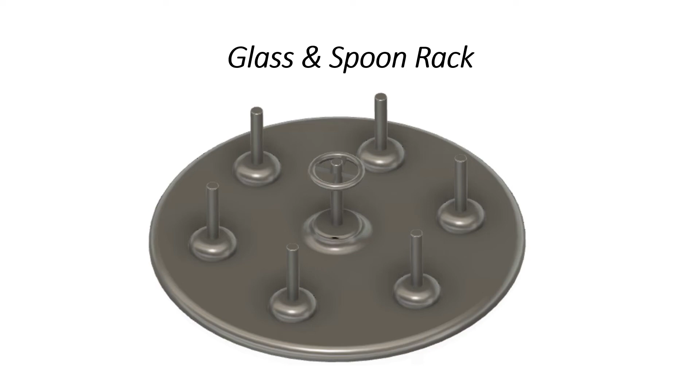In this exercise, you are supposed to sketch and design this glass and spoon rack. This is a drawing you have to follow in order to get the dimensions. Now let me show you how to design this in Fusion 360.

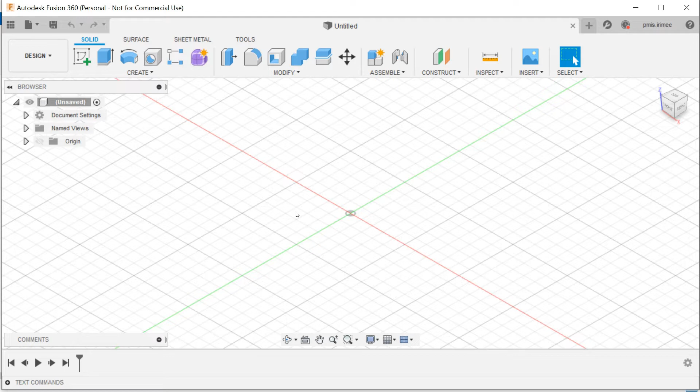Now I will show you how to create a glass and a spoon rack. In order to create a model, first we have to create the 2D sketch. Click on create sketch, choose a plane. I choose the XY plane.

Let us draw the base of the rack. So we need a circle. Choose the circle tool, click on the origin and drag to draw the circle of diameter 150 mm.

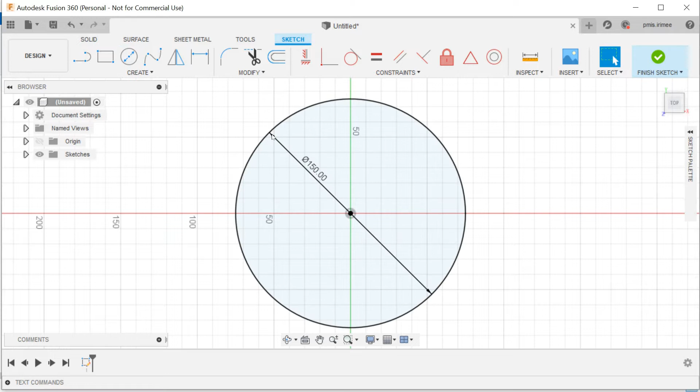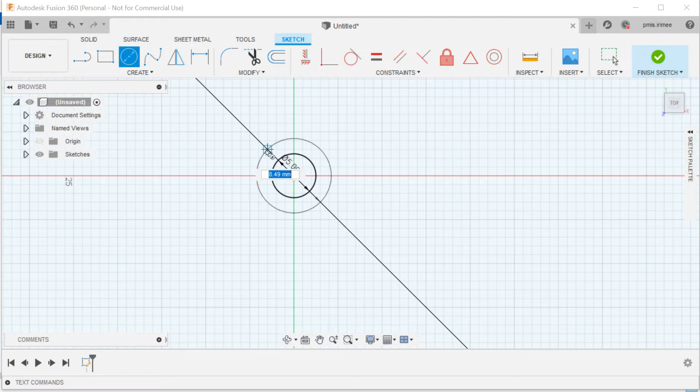Let me zoom to the center. At the center, you add a vertical extrusion of 35 mm. It was a circular extrusion of diameter 5 mm. So again, I choose the circular tool, click at the center and draw a circle of 5 mm diameter. And I also draw another circle for the support structure of 20 mm diameter and then fit.

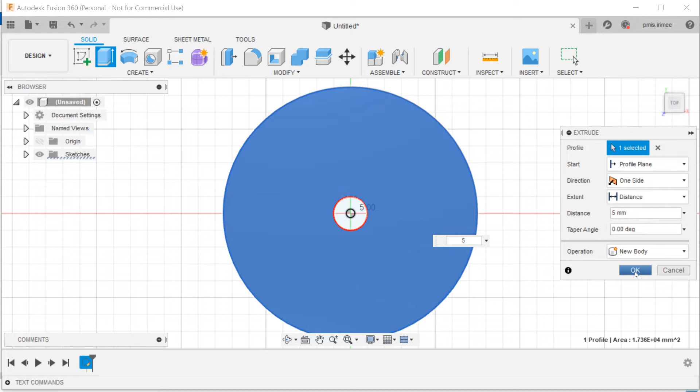So that's it. Click on finish sketch. Let's extrude this part. Click on extrude. Select this circle. And you extrude this to a height of 5 mm. It is a new body. Click on OK. And then now make the sketch visible.

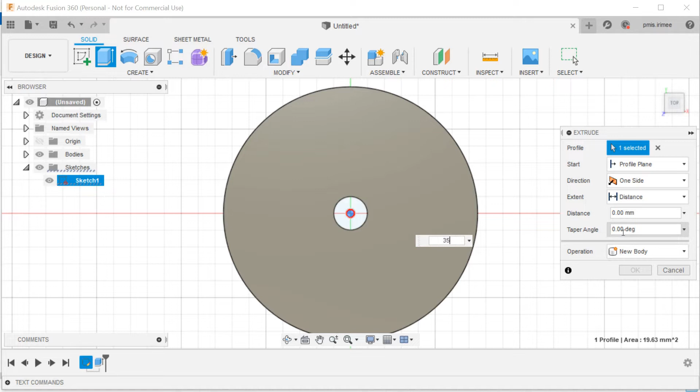Click on the center circle. This is a vertical extrusion and it is extruded to a height of 35 mm from the base. So again click on extrude, select the center and the height is 35 mm and it's also a new body. Click on OK. So if you orbit you can see

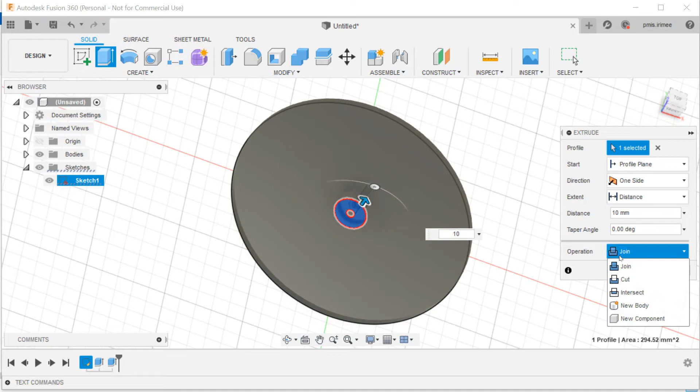the 35 mm extrusion. Now you again extrude for the support structure. Select this circle and extrude it to a height of 10 mm from the base. Now you perform the join operation and click on OK. Now if you see there is only one body, all the three extrusions have been joined into a single body.

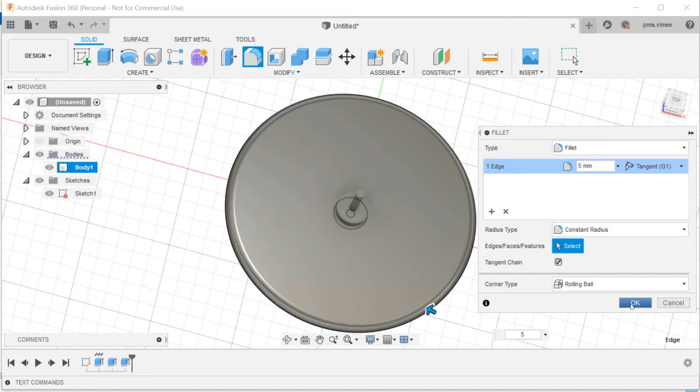So let's now apply the fillet. First I apply fillet to this edge. The radius is 5 mm and I click on OK. Then we have to apply a fillet to the top edge. The radius is 2 mm.

Click on OK. Now orbit this and choose the bottom edge. Again the fillet tool and now the radius is 5 mm. Click on OK.

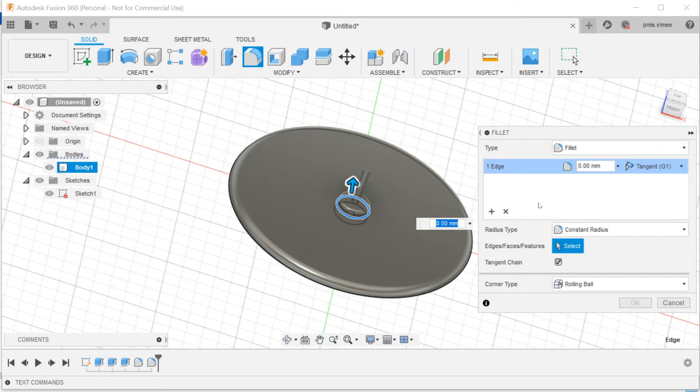We need to make 6 more extrusions. For that we need the sketch. So click on create sketch and you choose the plane. I directly click on the top of the base so that you can make the sketch directly on that area.

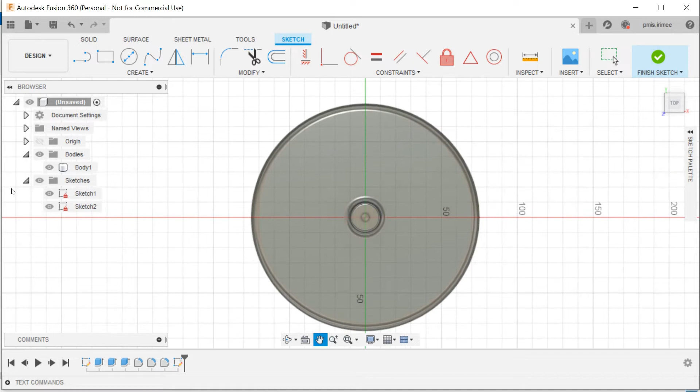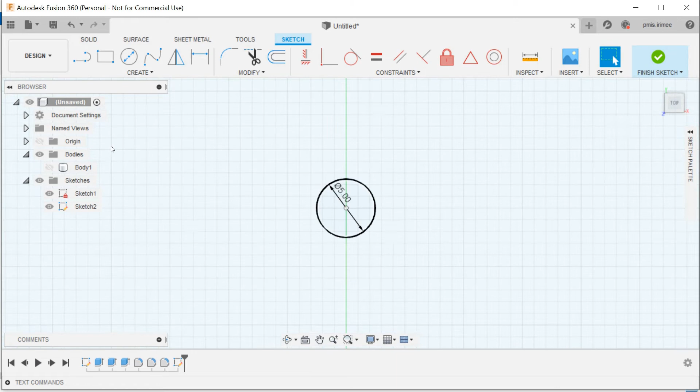I hide the body and here I need to create 2 circles. One circle of 5 mm diameter, that is for the vertical extrusion. Let me zoom to that area and we need to draw one more circle for the support structure for this vertical extrusion and the diameter is 20 mm.

Fit. Now if you see the circle is blue in color because it can be moved anywhere. So we need to fix it vertically. To fix that, I will click on the vertical constraint, select the center and also this center.

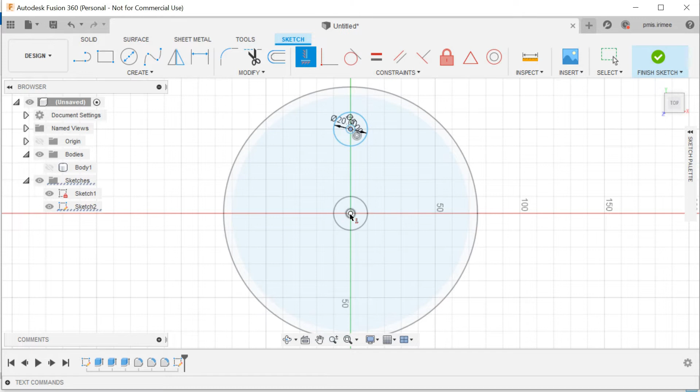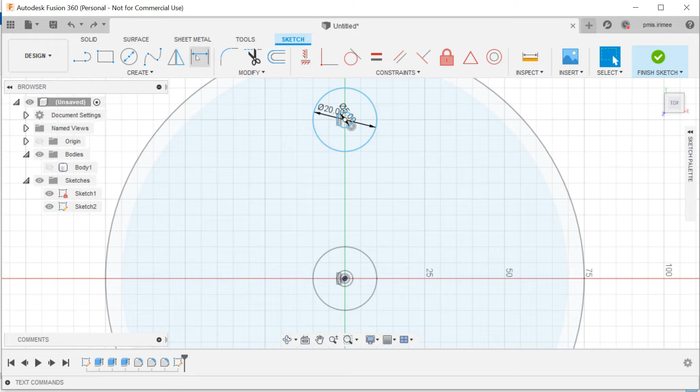We need to fix the distance between the center and this center. So we use the sketch dimension tool to fix the dimension. It's 50 mm. Now the distance is fixed. Now you can see the circle is fully black.

So to create a pattern, click on the create circular pattern. Now in the panel, first you have to select the object. Let me zoom this area.

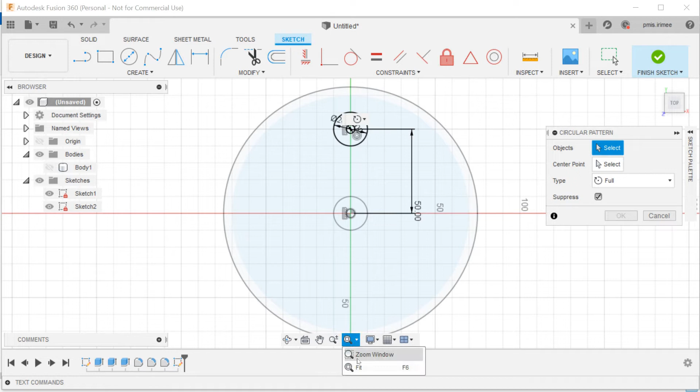Now I need to select the object. I select both these circles. Now I need to select the center. I select this center as the center, and now if I click press, you can see the default quantity is 3, but we need 6 circles around, so I change the quantity to 6.

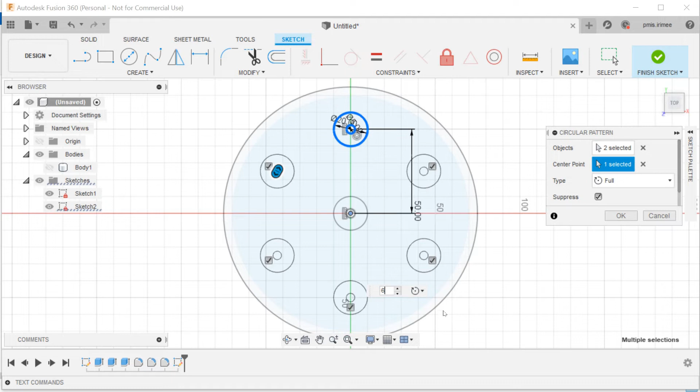I need a full length pattern and I click on OK. So it's completely done. It's black, so it is fully constrained. I finish the sketch. Make the body visible. Now again use the extrude tool. Choose the outer circle first.

Okay, now the height of the support structure from the base was 10 mm, but now we are doing it from the top of the base, so it is 5 mm. And it is a join operation. Click on OK.

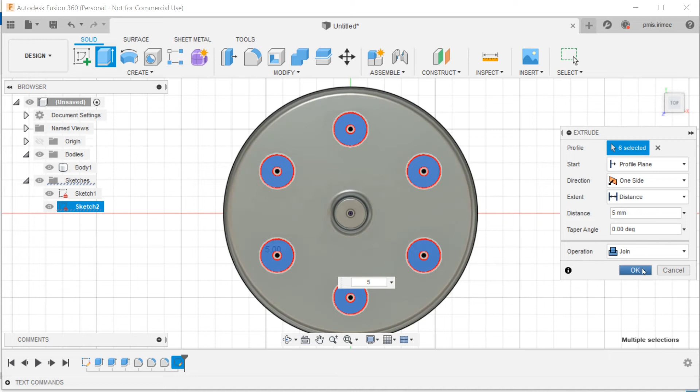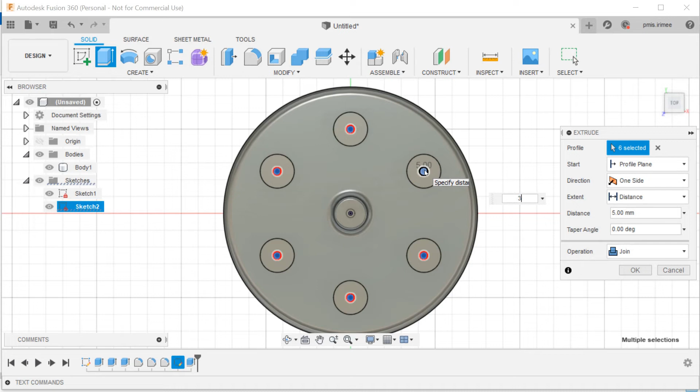Make the sketch visible, and now extrude the center circle. The height of extrusion was 35 mm from the plane, but this is on top of the disc, which is 5 mm, so the total length of extrusion should be 30 mm here. Again, it's a join operation, so click on OK.

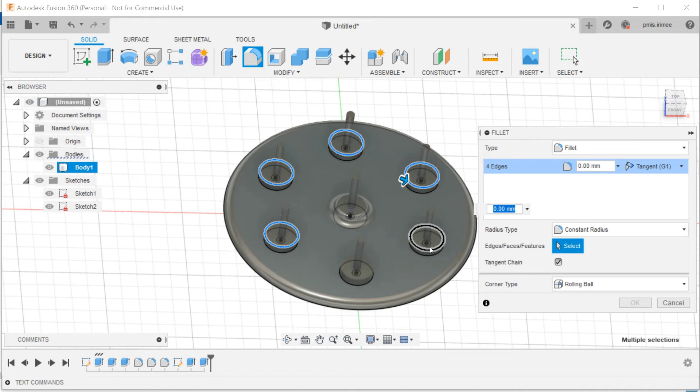If you orbit this, you can see the extrusions here. Now let's apply the fillet to the top edge of these support structures. Click on the fillet tool and choose the top edge, and now the radius of fillet is 5 mm, and now click on OK.

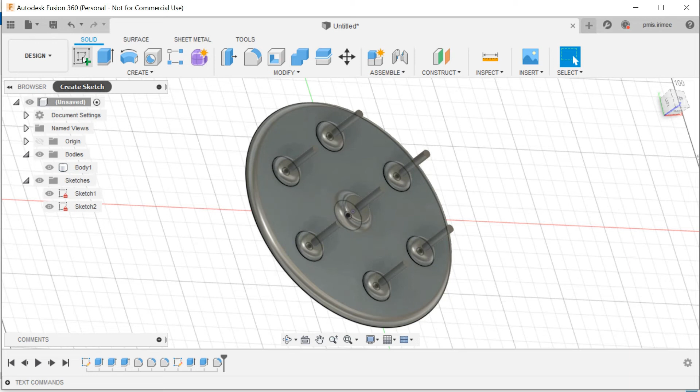So it is done. At the top of this plane there is one more structure. To do that we need to make the sketch for it on this plane. Click on create sketch and directly click on top of this face. Now if you see, the sketch plane is on top of the extrusion. Coming back to the top view, I hide the body.

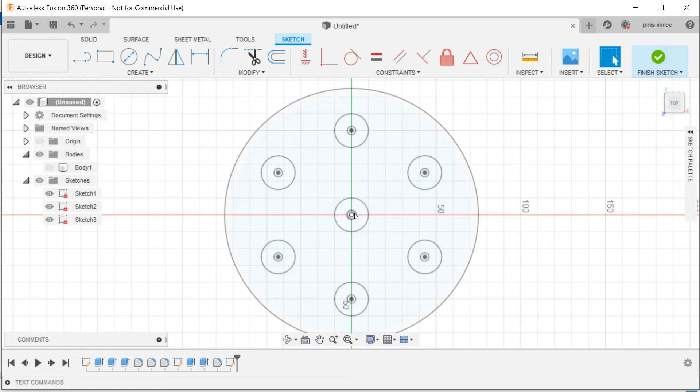Now I need to make a circle. There is a 5 mm extrusion circle here and a 20 mm circle here, so we have to draw 2 circles. Let me hide the first sketch now. Select the center and make a circle of 20 mm diameter.

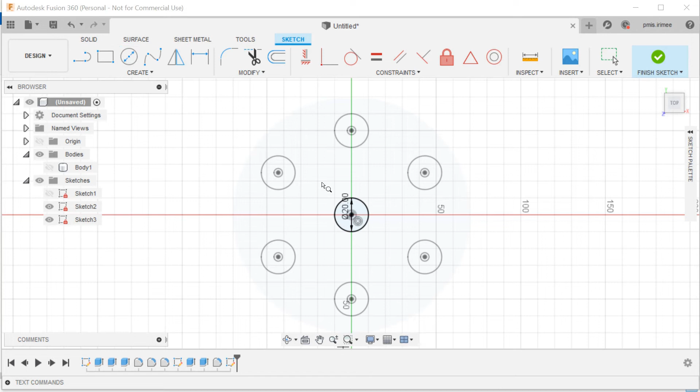Let me zoom this part so it's clearly visible. Another circle of 5 mm diameter. So it's done. You need to create a joint between this circle and this circle, and now you have to create a circular pattern of this object, with this as the center point, and I make the quantity as 4. Okay, so it is fully done.

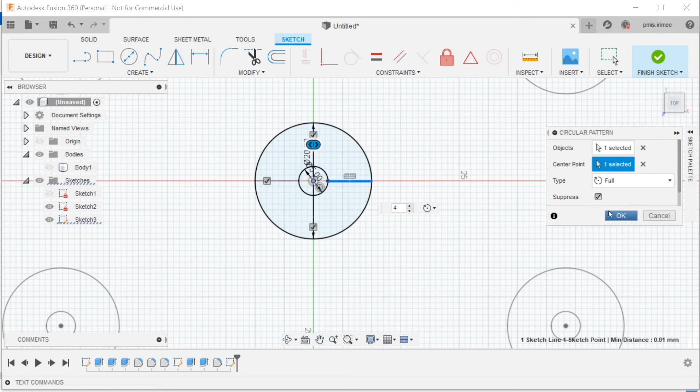Now click on finish sketch. View the body, fit. If you orbit now, then you can see that the sketch has been made on top of the vertical extrusion.

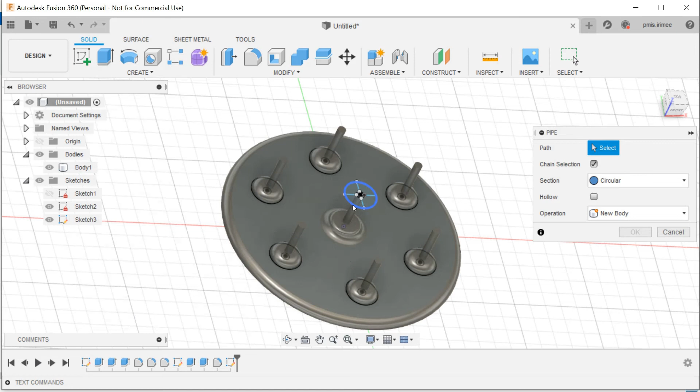So let me first apply the pipe. This is the path for the pipe, and it is circular and the section size is 3 mm and it's a new body. Click on OK. Now let me zoom into this area.

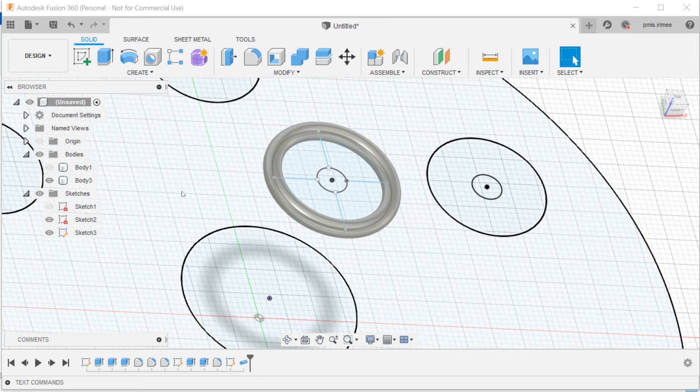I'll make the sketch visible. Hide this body. Now I'll also hide the sketches. So I have to create one more pipe here.

So I select this and create pipe. It's a square pipe and the section size is 2 mm and it's a join operation. I click on OK.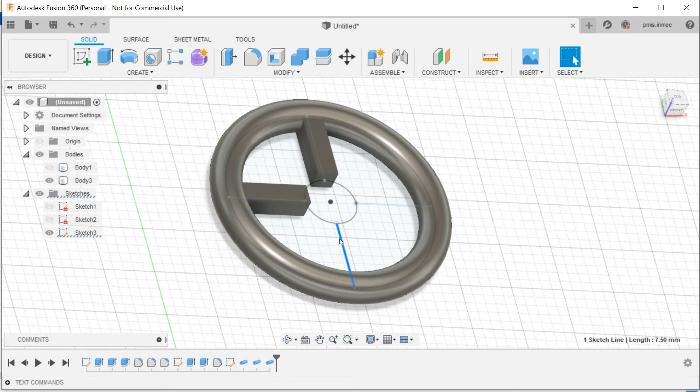I choose the next line, create pipe, it's again square, 2 mm section size and join operation. The third line, it's a pipe, square, 2 mm join operation. And the fourth one, pipe, square, 2 mm and join operation. Click on OK. So it's done.

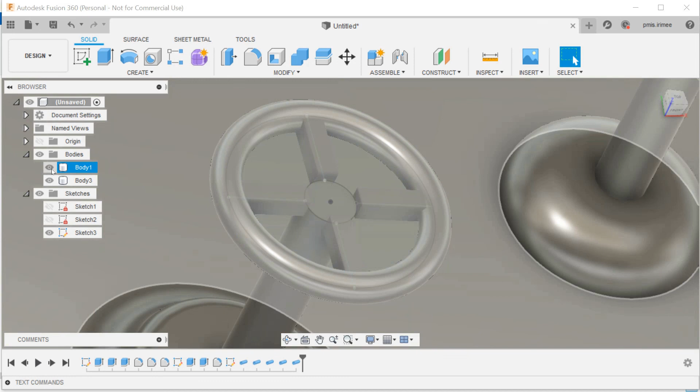Sketch is visible. I'll make the body one visible. Now we need to make one more extrusion here of this circle to a height of 5 mm. And this is not a cut operation, this is again a join operation, then click on OK. So all the parts are joined, so you just have a single body now.

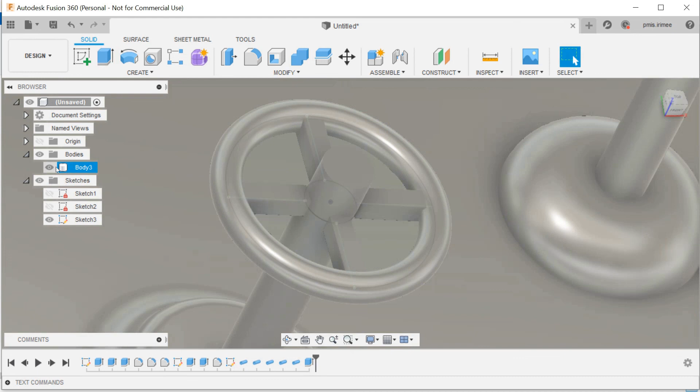Hide all the sketches. Fit. So now you have a single body. You still have one more pending. One last thing that is pending is you need to apply a fillet to this edge. Select fillet and select this edge, and you need to apply a fillet of radius 0.5 mm here, then click on OK.

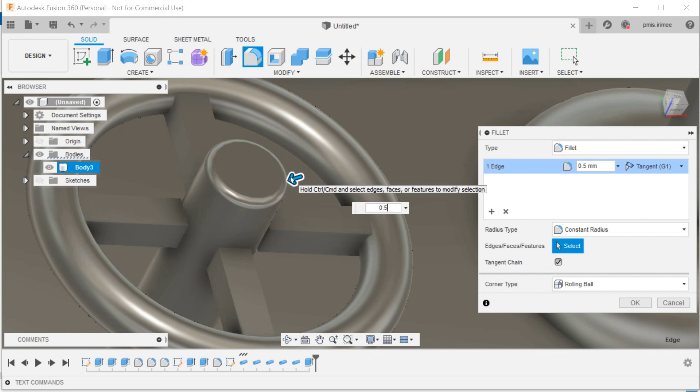We have created the model. Let's now save it. I save it with the name glass and spoon rack. Save.

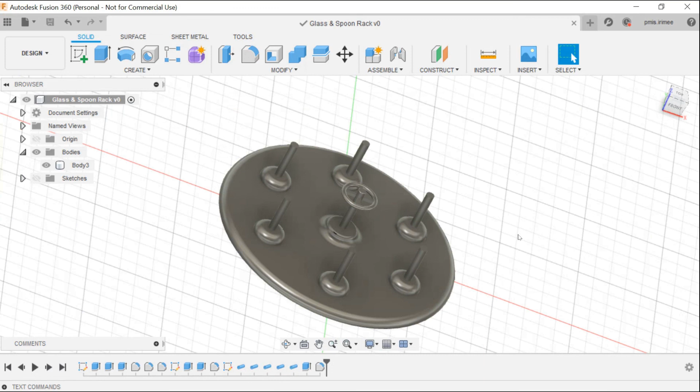This is how you make a 3D model. Thank you.